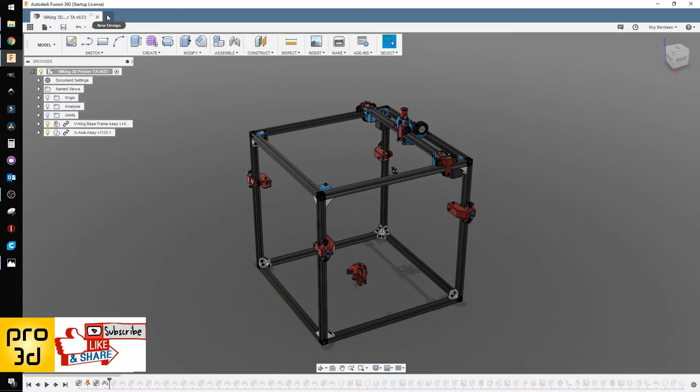Let's do some very basic stuff. Let's hit a new design and start off with creating a sketch as normal, and choose your plane, whatever would be normal for the part you are designing. I'm gonna design a cylinder.

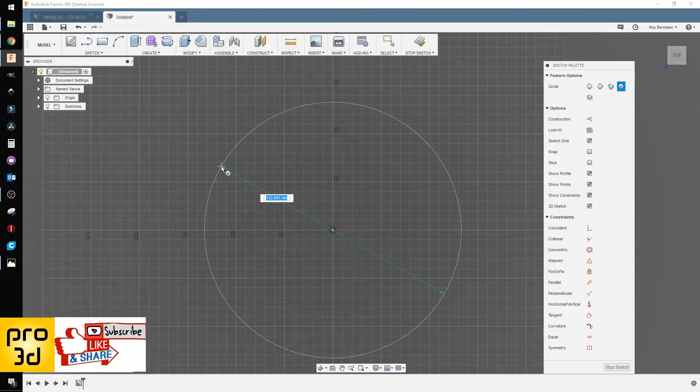So to design a cylinder, I'm gonna start with a circle. Let's just click it out like this. As you see in my preferences, I have maybe some other colors than you have, but that's not important. My circle is now magenta or something, and I want to constrain it so I cannot drag it.

That's very important. The only way to constrain this now is to put some dimension on it, and we do that by going to the sketch panel and sketch dimension. You might want to keep that in your menu, so you just click these three dots and say pin to toolbar. Then it will show up here in the toolbar.

So we can hit the dimension, or D on the keyboard, and just click the circle, release the mouse button, drag it somewhere, and let's say 100. Now you can see my circle gets white - yours might be black, I think that's the standard. That says to me that we are constrained, so nothing can move, and that's the most important thing. You want everything to be constrained in your sketch, or it will just fall apart at some point.

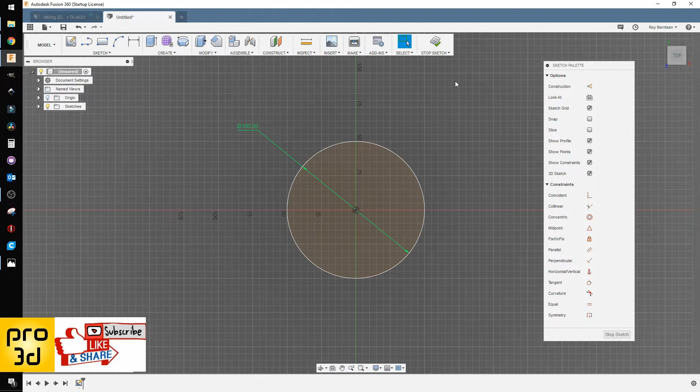Okay, now we can just stop sketch and extrude this guy. We just click the profile, or we can click extrude, create an extrude, or hit E, or click the extrude over here in the toolbar. So where did that go? Yeah, so here we are.

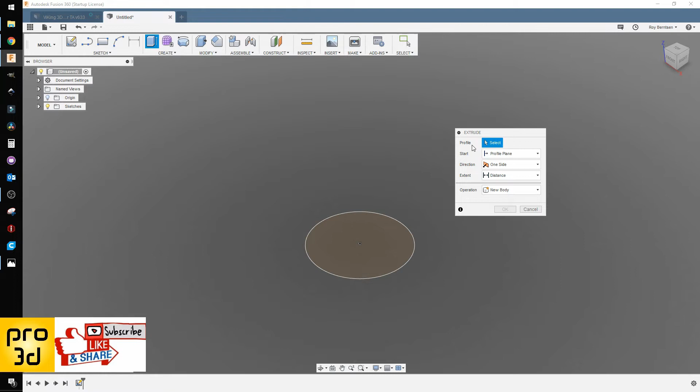So we instantly get the message of selecting profile, and then we have to have a closed area which we choose, and we can drag it out or just tell how long we want it to be. Let's say 150. You might see another color on your body than I have, because that's in preferences.

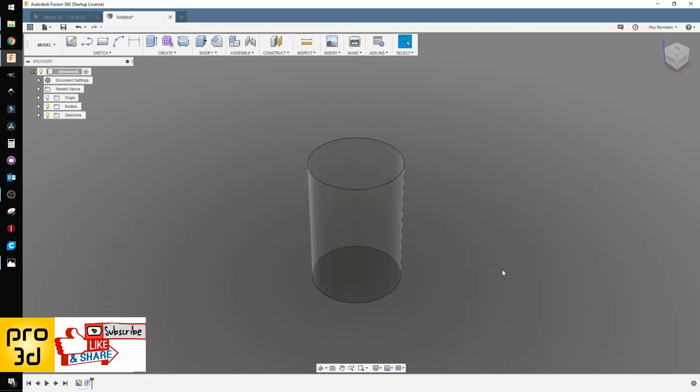So let me just change this color. You can do that by just right clicking and go to appearance, or hit A on the keyboard. Let me just do it Viking blue like this. So now we have one cylinder.

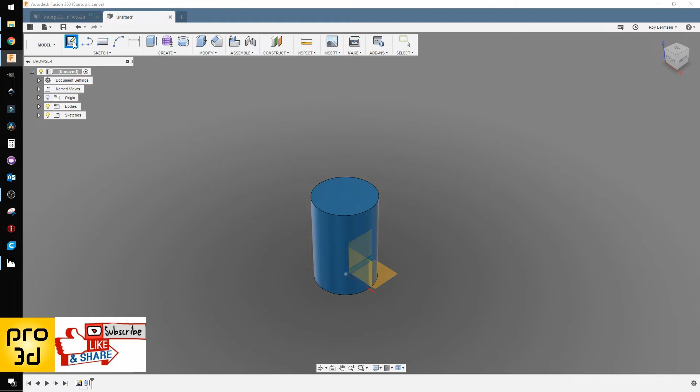Not very exciting, but let's see if we can do the same thing another way - this is all about techniques, so that's one technique. Let's do another sketch, on the wall. Let's do the front wall or the front plane, and let's do first a line.

I want to start in the origin and just go right out to the right and click somewhere, then go straight up, then to the left, and straight down.

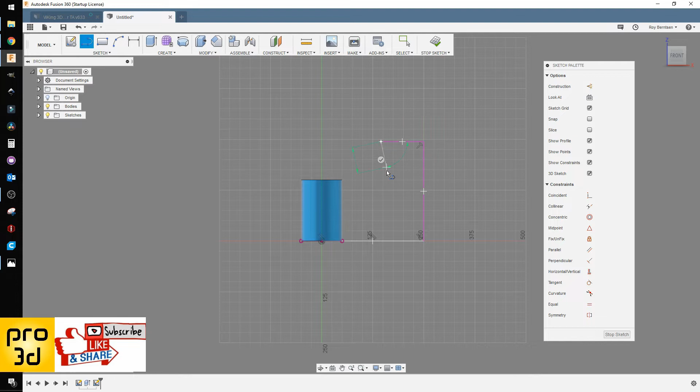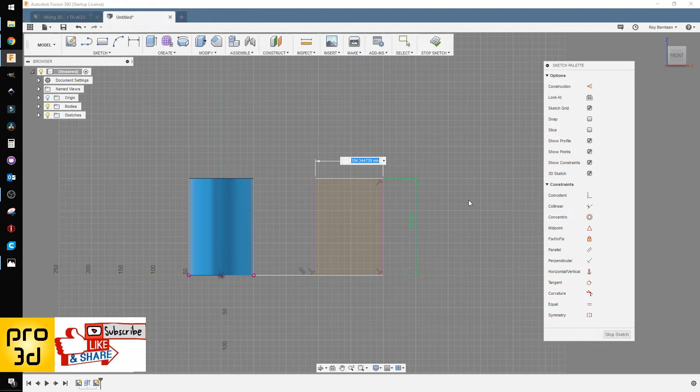So what I want to do now is do some dimensions again. Again, we see magenta and we see white - we want all white. I want this line to be the same height as my first cylinder, and it was 150. And this guy I want to be half the size - I want it to be the radius of this cylinder.

At this point I don't remember, so let's just click the cylinder and look down to the right. We can see 50 millimeter radius, so let's click and say 50.

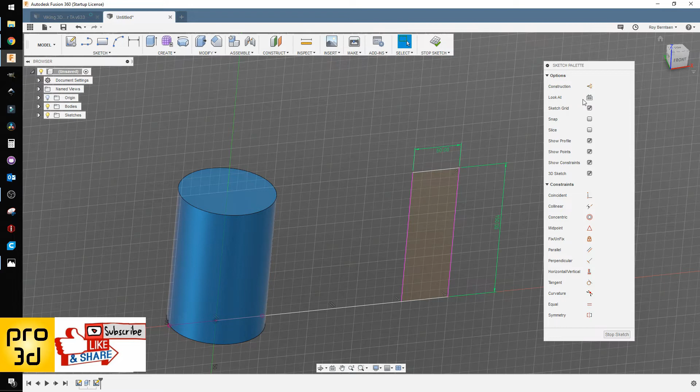Okay, and I want to go from the front again, so I hit look at to see the sketch like I need to. The reason this is not constrained now is that we can move it this way, so let's do another dimension from the origin and out, and let's say 150. So now everything is white.

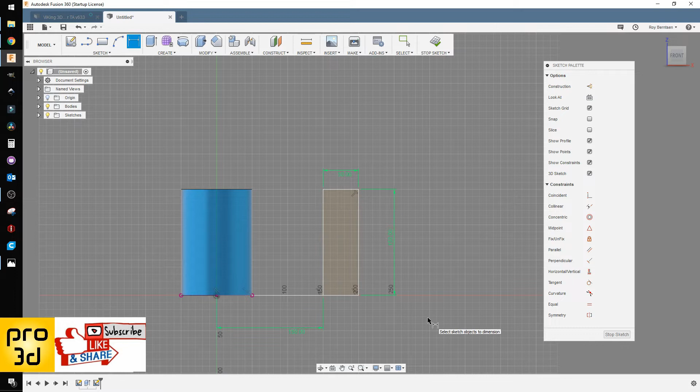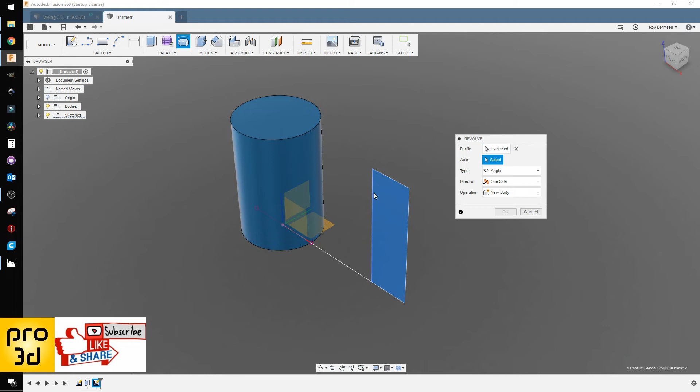And how can this be a cylinder like that? Well, we can go to the create menu and maybe use revolve. Let's hit the profile again, and then in this box we can hit select axis, and we can use that one or this one - let's use this one. So now we have two cylinders and both are exactly the same.

So let's make this one another color.

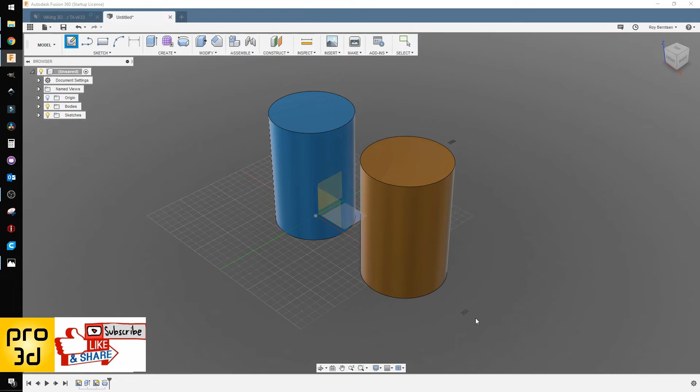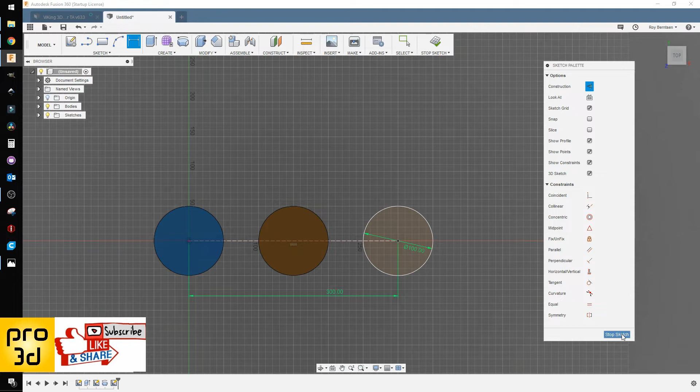So let's cover one more way of creating bodies, with another sketch. We want to sketch one on the floor. Let's do another circle, and we want the circle to be 100, and we need to constrain it so it's on the same plane as the others, like this. We can do that by making a helper or construction line. Let's drag that out and make some dimensions again, so let's do that 300, and stop sketch. We need one more sketch.

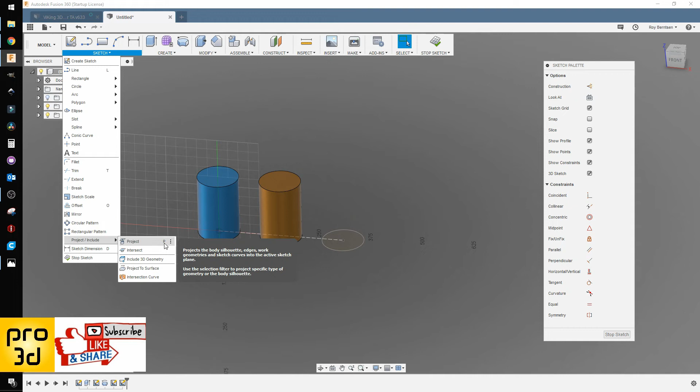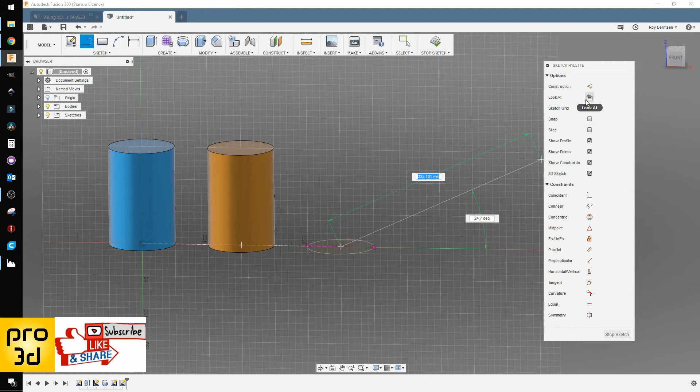We need this sketch to be on the front plane, and we need to project our last sketch. So in the sketch panel, go to project, include project, or hit P on the keyboard, click the circle you just created, hit OK, and hit look at. We do a line from the sketch menu, and find the center point like this. Look at, then go straight up and hit finish, then do dimension on this guy, which also was 150, and stop sketch.

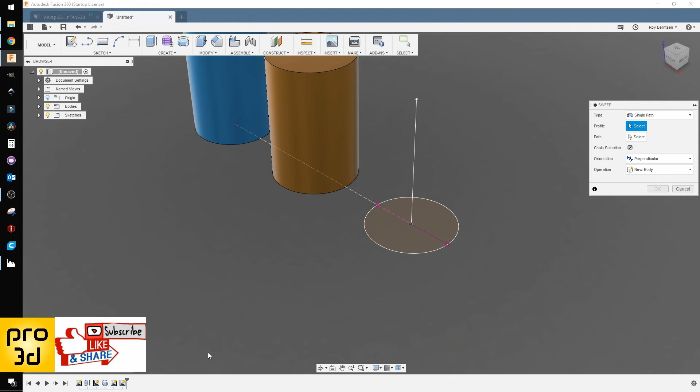At this point we actually have, yeah, so this is okay. We go to create and do sweep, and let's hit the profile as asked, and use path, the line, and OK. So again we have the same cylinder but with a totally different way of designing.

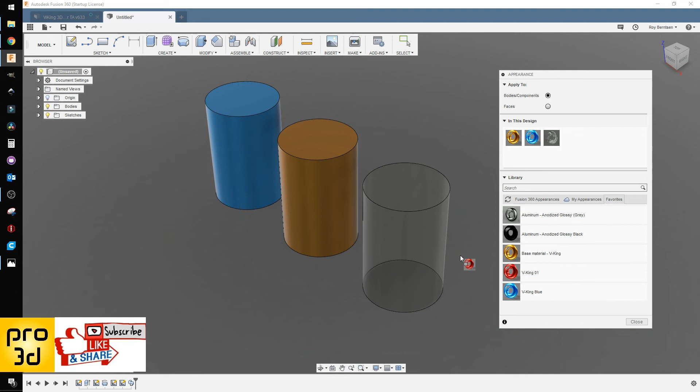Let's do that on third material, and let's have a look at under create what we can do more. We have one more, that's loft, so let's use loft as well.

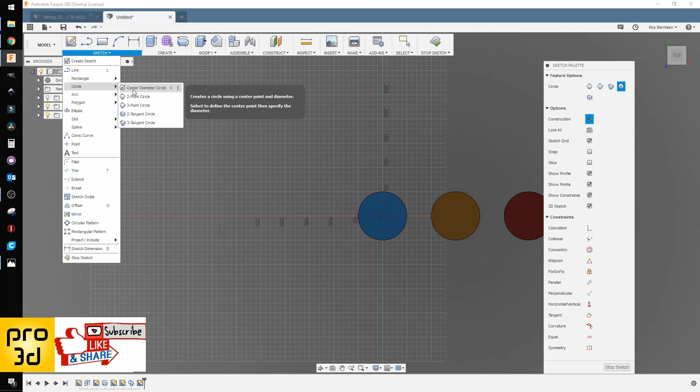So another sketch on the floor, let's do that one over here, and 100, and we want a helping line, construction line. First a circle, a sketch and circle, and we want this to be a solid line, so no construction line, 100, and then a line from the origin and out. It could be a construction line. Just leave it here, and then we are going to use some more constraints.

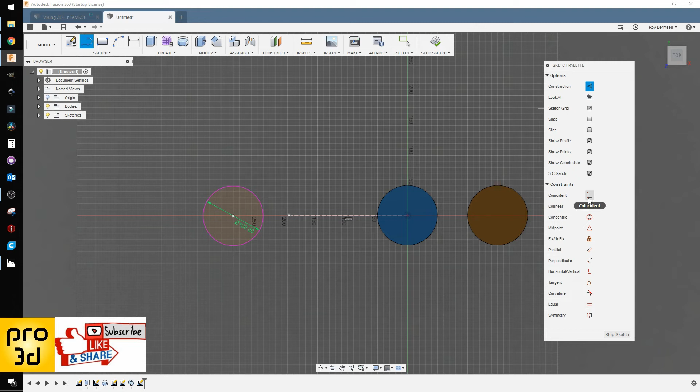This is important again, you need to know all these constraints, so you need to figure out how these guys work. This is coincident, we're going to use it from the point to the center point. And we're going to do dimension on the line. Let's say 100. No, 150 we want. Like that.

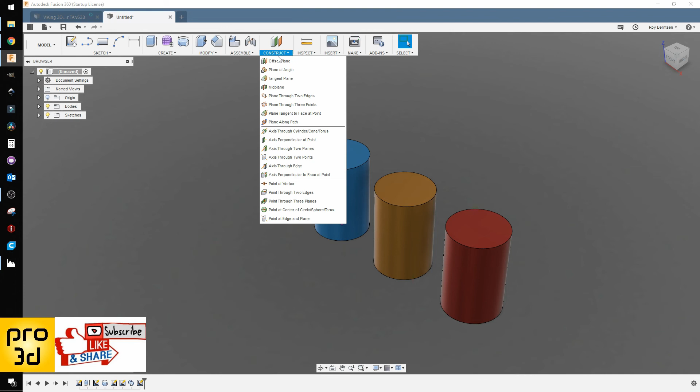And stop sketch. At this point, to be able to loft, we want a plane which is higher up, so we need to use construct and offset plane. We can just hit the profile and drag it out, and let's say 150, which was the height we wanted. So as you can see, here it is.

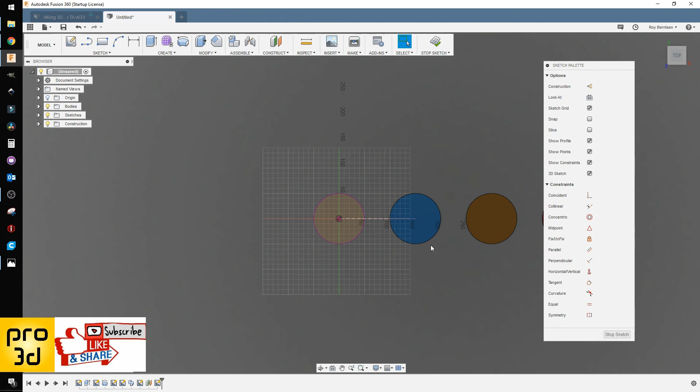And we want to draw on the plane, so let's create sketch, hit the new plane and hit create sketch. At this point we could use project and hit the first one, or we can, if I just Control C, make a new circle, and make it 100 or something else, but let's make it 100. We want to have it on top of the bottom one, so this is now higher up.

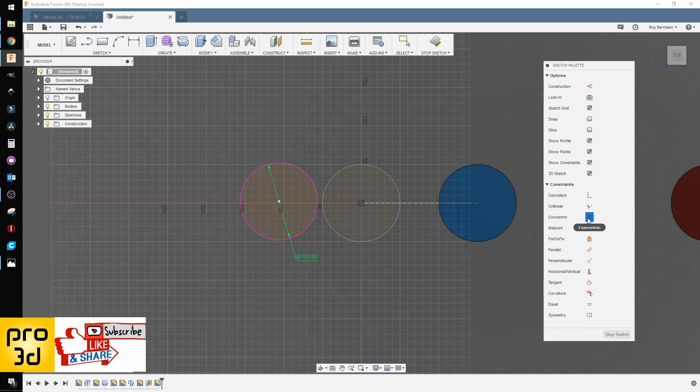And if we hit look at, we can use concentric. So I hit concentric in the constraints and I hit the bottom, as you can see, I hit the bottom. It will, excuse me, like this, and then the new circle, and it will constrain like this. Stop sketch, and create and loft, the first profile, the second profile, and OK.

So now we've created this exact same thing with various techniques, and that is what I wanted to show you today, so you can get started in Fusion and use the different create techniques, because they can be very useful on different objects. Especially for circular objects, you might want to use revolve, because then you can draw the profile and just revolve it. Loft can be useful for something else, sweep for something different.